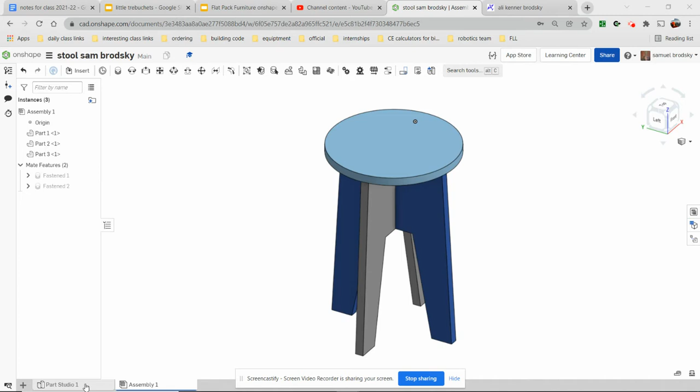The first thing I do is download my sketches by right-clicking on them and exporting them as a DXF. Let's go top. It's set to download, set to DXF, not DWG, and I'll export. Do the same for sketch 2.

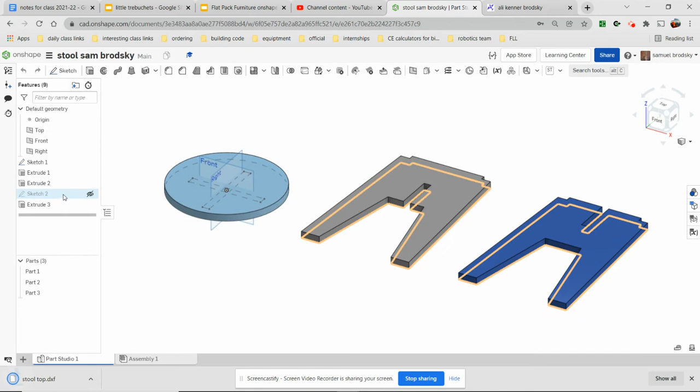Now I have the two parts of my stool, drawn in Onshape and exported as DXFs, which will import into VCarve. I'll create a new file. I'm going to make it 24 by 18 — I can get this out of the small ShopBot, maybe.

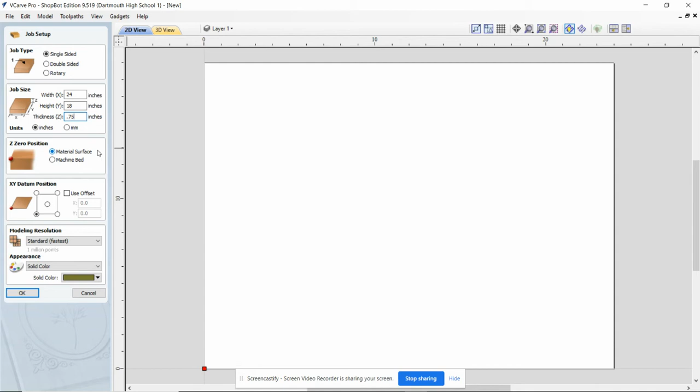0.75 thick, because I've chosen 0.75 thick — that's up to you to choose. Material surface, bottom left. Choose OK.

Now I have to import my files with this button here, import vectors. I'll have to choose a downloaded file to import — the first thing is the stool top. Open that. You're going to get this error — don't worry about it. There's my stool top.

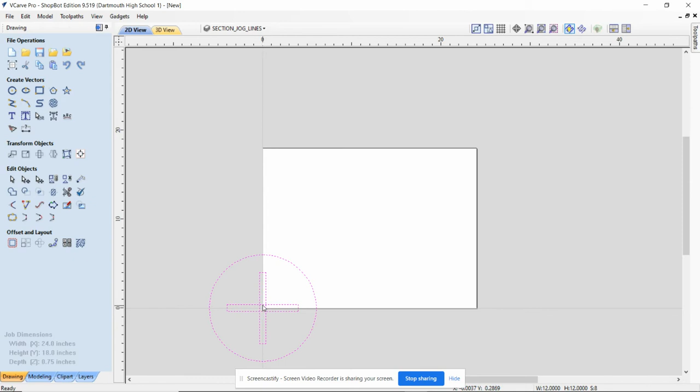If everything's selected, I can click again on it — that is, if the whole thing is selected, not just part of it. Then I can second click on it and move the entire thing all together. Put it up here, sure.

All right, now it's time to import the legs. Again, ignore the error — there's my legs. Second click, so I can move this.

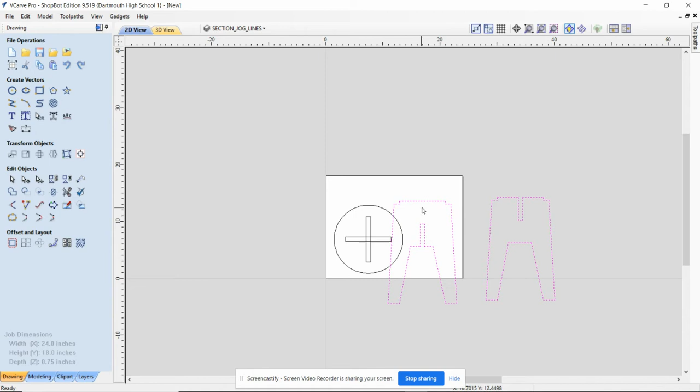It looks like my 24 by 18 is not going to work, so I'm going to have to increase the size of the file. I can actually bring these a little closer together, though, and save some wood. I could probably flip that over as well, but I'm not going to worry about that quite yet.

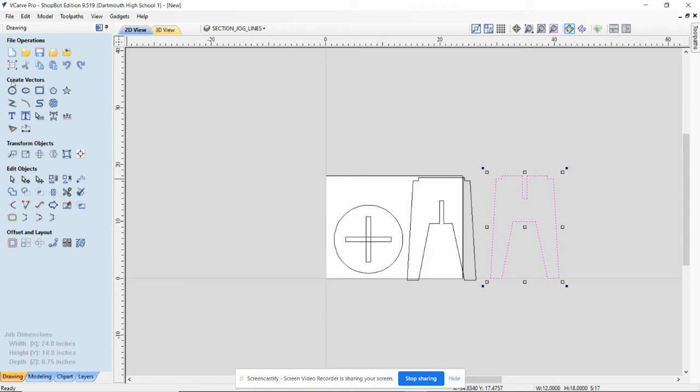Let's get it sized correctly. It looks like the width is maybe — let's see, looks like it's 40 overall, so I'll do a 48. I mean, it's basically 46, but lumber comes in 48. 18 doesn't quite seem to be enough, which makes sense because the stool is 18 tall, so I'll make that, say, 24.

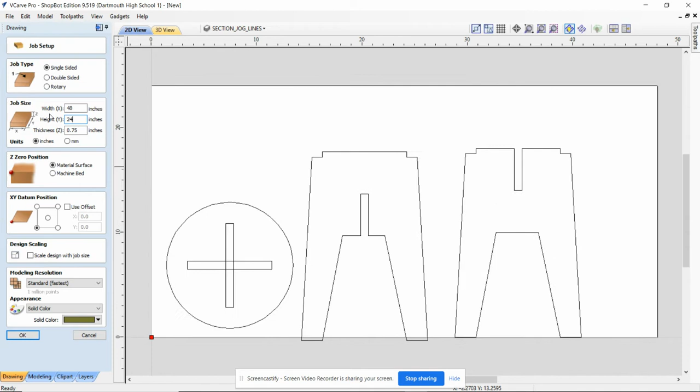Then I can choose everything and use this command to center it in the material. There's a little bit of waste here that I might want to clean up later. I'll deal with that on a case-by-case basis.

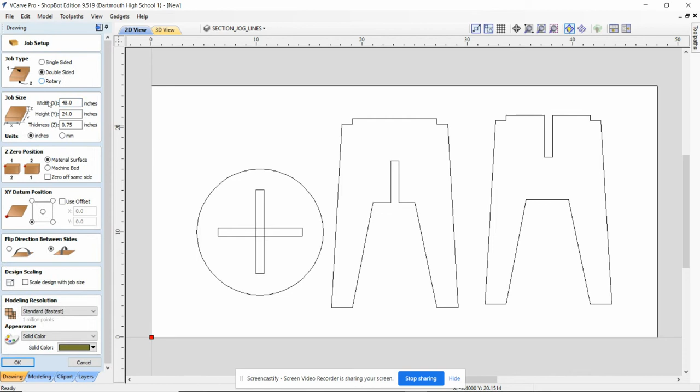So now I've got these files in here. I'm going to change this to double-sided, because I'm going to want pockets in the bottom and etching on the top. Not everyone will have a double-sided piece, but this one is — that means I can have cuts on both sides of the lumber.

Next step is cutting these pockets, so I'll select these pockets. Wait, it doesn't look like I have pockets yet. Same thing here — I don't have complete tool paths.

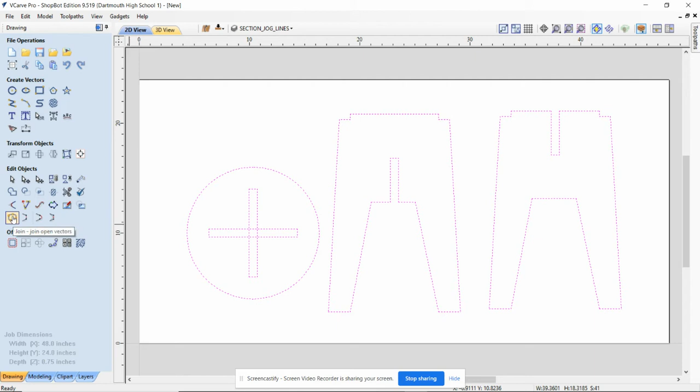So the next step is to select everything and join them. Initially, there's one closed vector, probably that circle, and a whole bunch of open ones. After I do this, there's 4 closed — there will still be 3 open. I'll have to find those and fix them.

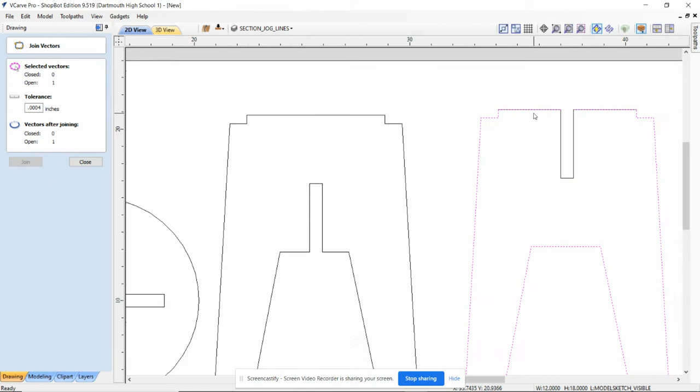It looks like there's a weird little extra line here, and on this one there's some weirdness going on. Sometimes, depending on how it's drawn in Onshape, you get weird stuff out of here. So what I can do is zoom in — looks like it just didn't know how to connect them.

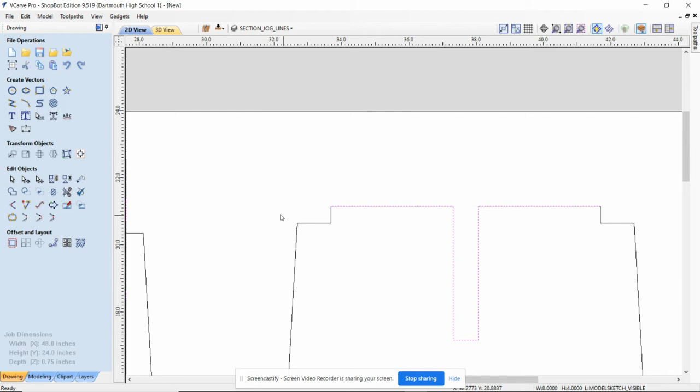Let's see if I can try one more time. No, it won't close them. But what I can do is use my cut command to cut one of those extras. Now I only have that.

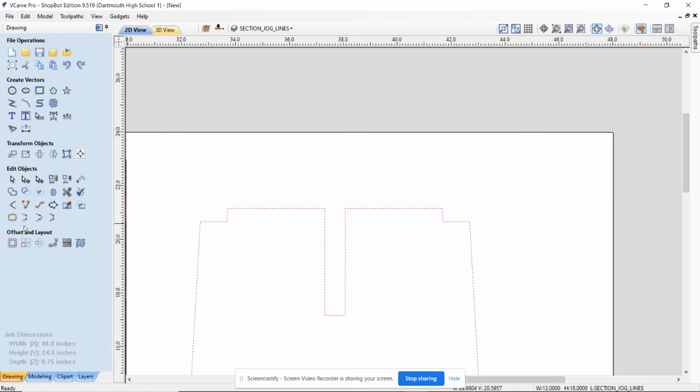Still something weird going on here. I'll use my cut command to do that — cut one of the extras. Perfect, now when I look at join, they're all joined. And if I look at the whole thing, each one of these is all one particular cut.

Over here, I'm actually going to want to cut out those centers, so I'll use this cut command again to chop out these little bits. Now I have a pocket.

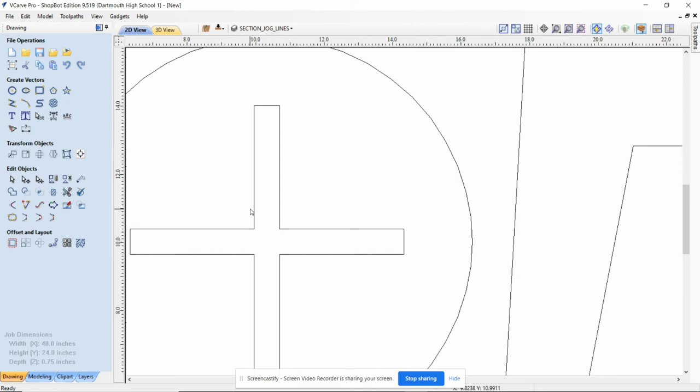So with my pocket, I'll use the pocket command, which is in the toolpath commands. By clicking up at the top, you get to switch between toolpath and drawing tools. You can have them both open at the same time, but I find that unnecessary, and it cuts down on your workspace. Here is the pocket toolpath.

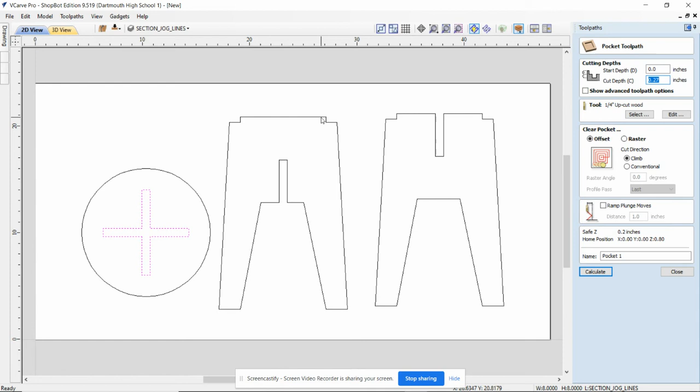I'm going to cut a depth, which has to be the same as this height here, which hopefully I remember — but if I don't, I can go back and check. I'll do that now. I'll use this tool to measure the distance from there to there. That distance is 0.5 inches.

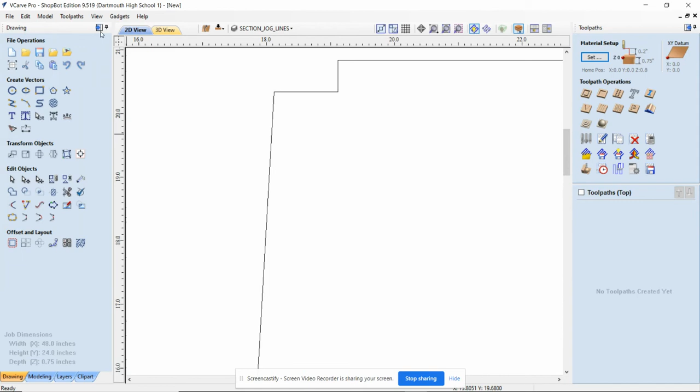Excellent, so now I'll go back here — these pockets will be 0.5 inches. Pocket tool, click here, I'm going to go 0.5 inches down. I like to ramp my plunge moves about an inch. Don't need the advanced options. And I'll call this the stool top pocket.

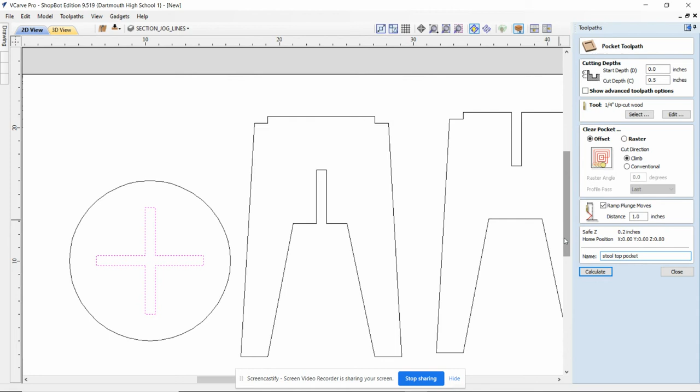And let me close the door.

We can preview the toolpath. That's exactly what I wanted. Perfect. Now I can move on back to my 2D view.

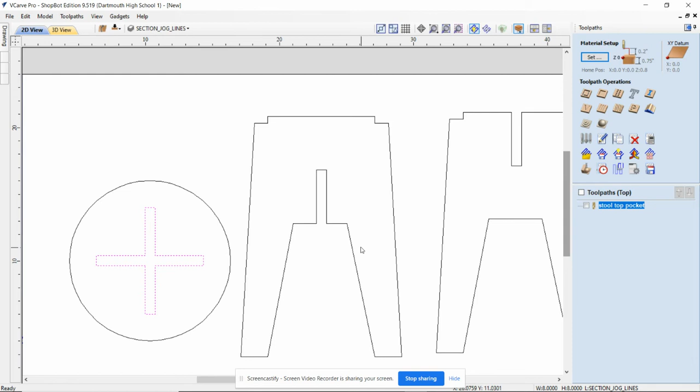I have to start cutting the outsides of this stool, so that can all be at once. I'm going to shift select all of these and do a profile toolpath. This is to cut the outsides. Make sure my machine vectors are on the outside right. I'm going to choose a bit - I use that same quarter upcut wood bit because it's nice and I have a lot of them.

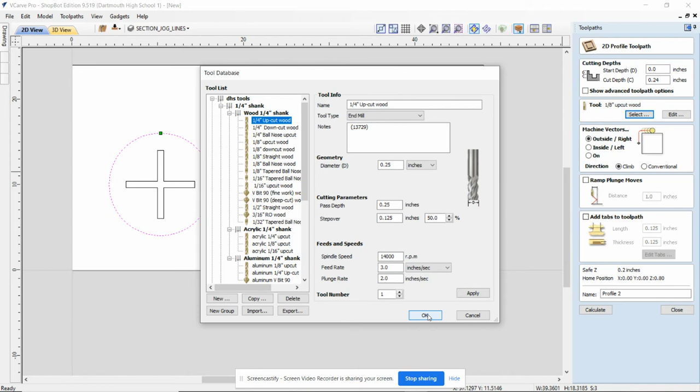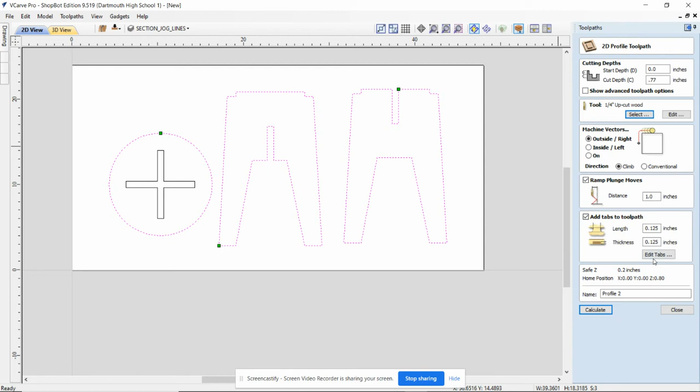I'll choose OK. I want to cut through the wood this time, so instead of 0.5, I'm going to be going 0.77, which is all the way through and into my spoil board because this has to get cut out. I'm going to ramp the plunge moves and add a tab. I'll edit these tabs - I need at least 3 tabs per piece, just to hold it in place while it's cut.

And I feel like it might be better there. I don't know why I feel that way, but I feel like it might be better there. This one might be stronger here.

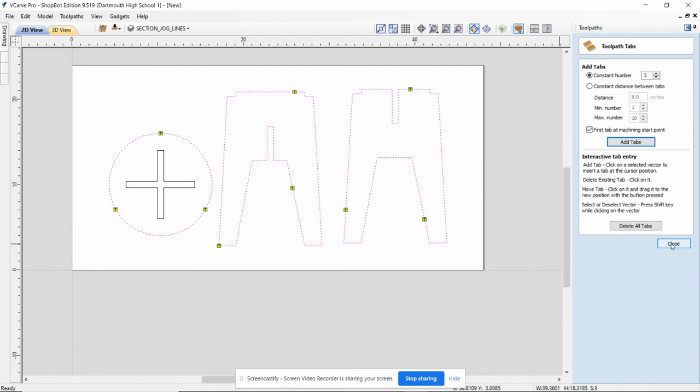All right, and they are not big enough for this giant object. I'm going to make them about 0.5 for something this large. They were set smaller for a ping pong paddle. And this is the...

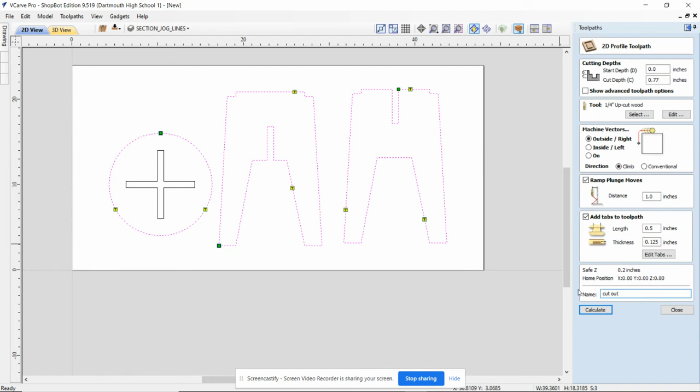All right, that looks pretty good. Back to my 2D view. And if I don't want these arrows, I can uncheck the toolpath - if I do want them, they just show where the tool is going.

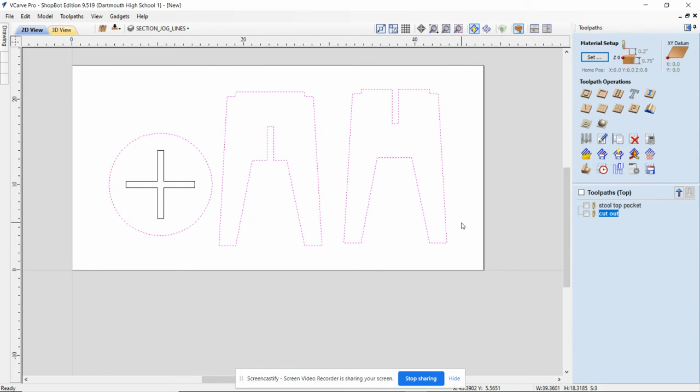So there's only one problem now. Preview - preview all toolpaths, that's exactly what I want. These tabs are holding it in place while the cutout is done. The only problem is if you zoom in here, these are rounded and those are square, and that's rounded, but this is square.

So we're going to have to add dog bones to make that fit. I also want to check out how long this will take.

Not too bad - 14 minutes, 4 minutes for the top, for the pocket. Yeah, that would work. If I wanted, I could try to change the bit and see if it would go any faster.

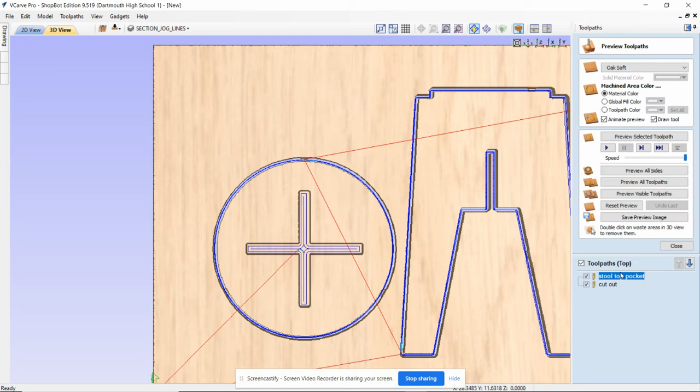That would be pretty easy, it depends on your design. I'm just going to see if I can try a 3/8 upcut for the pocket, and a 3/8 upcut. This is a bigger, chunkier, faster bit.

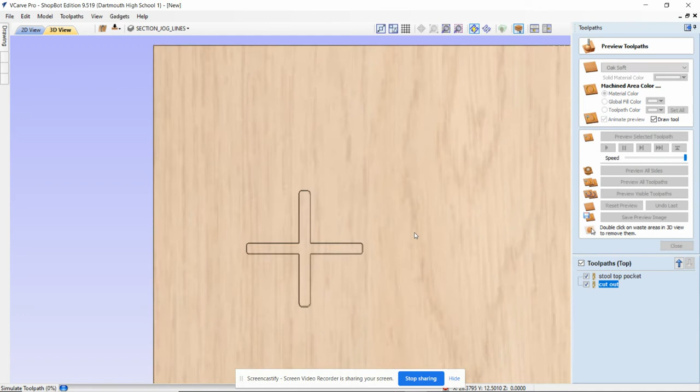That error was just that it's going to cut through the material - I agree it will. Reset the preview and I'll preview all toolpaths. So it's more of a round, which is a bit of an issue, but not a huge one.

We'll check the time - it cut down the time a lot. Mainly that's because this bit is so big and chunky, it can go through the plywood in one pass. It doesn't need 2 passes.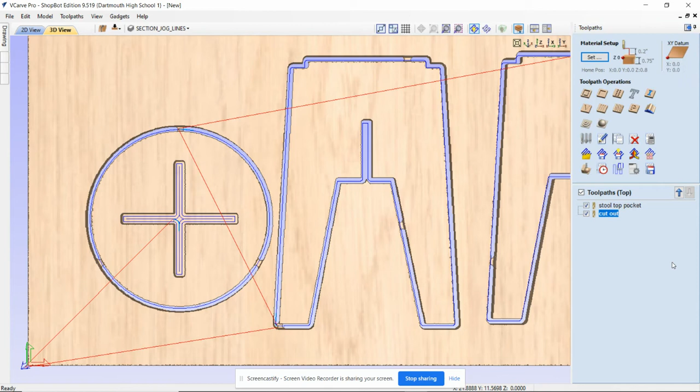But let's add some pockets to it, so we have to do the pockets in the 2D. Now there's a reason I chose my bit before my pockets, because adding those dog bones - we have to add the dog bones. There's a reason I chose a bit before adding dog bones, and that's because we have to know the size of the bit to make the dog bones.

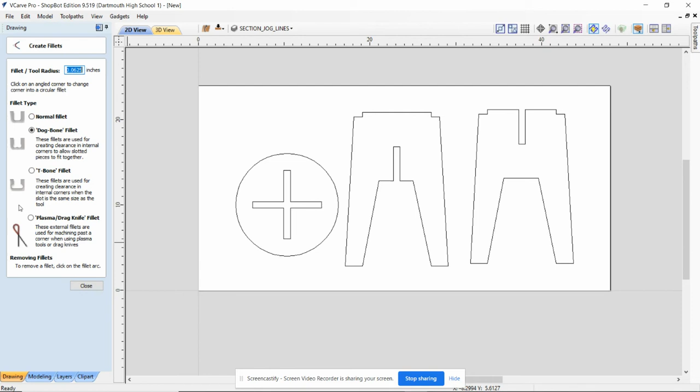To make dog bones, click on fillet, click on dog bone fillet or T-bone. I like dog bone, but you can use either. And then put in a tool radius - so a 3/8 tool has a radius of 3/16.

Now if you don't know what 3/16 is, that's okay - they don't, okay, because you must have a calculator here. 1875.

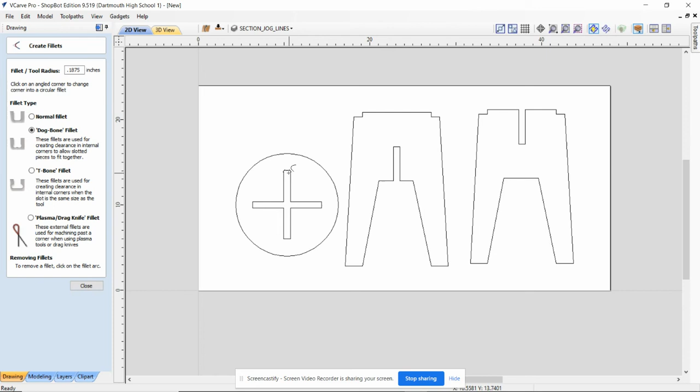Okay, so there's a fillet radius, and I have to choose a fillet. What it's doing is it's making a little lump, and that provides a path for the next piece to fit on.

I'm also going to need one here because that has to fit in there at the top. And I'm going to need one here and here and here. Now these are also going to have to fit together, so I'll need one there and there and there.

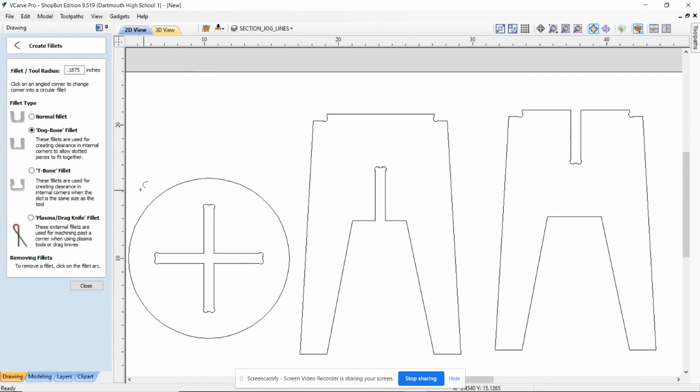Now I don't have to redo my toolpaths, but I do have to recalculate them, because if I went to preview now, reset the preview, previewed all toolpaths, there's no dog bones - it's running the old one. So I'll recalculate all my toolpaths.

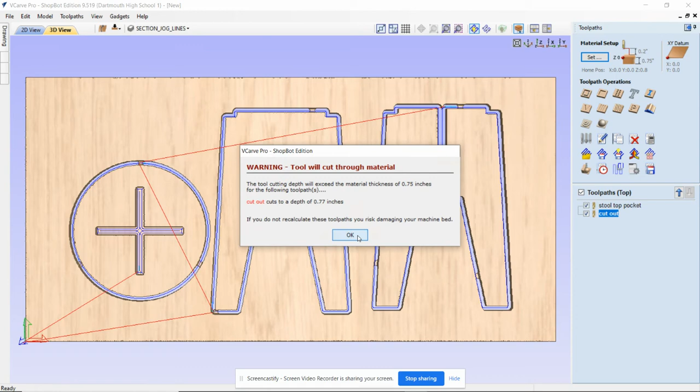It's going to redo it, and now I preview all toolpaths - see, it cuts out my little dog bones.

Excellent, so my stool is all cut, except I wanted to add some text to it. So I'm going to flip it over, and on the other side, I can't really see anything.

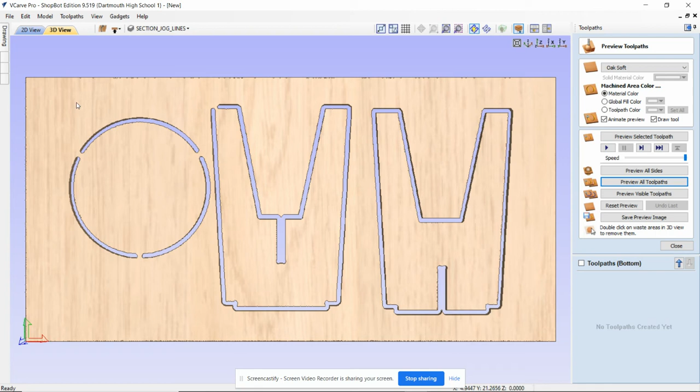But it shows me what the sketch looks like over there, so now I can add some text to the other side, or an image.

What image do I want? Well, this stool - spoiler alert, I already actually made it. I put my wife's dance company logo on.

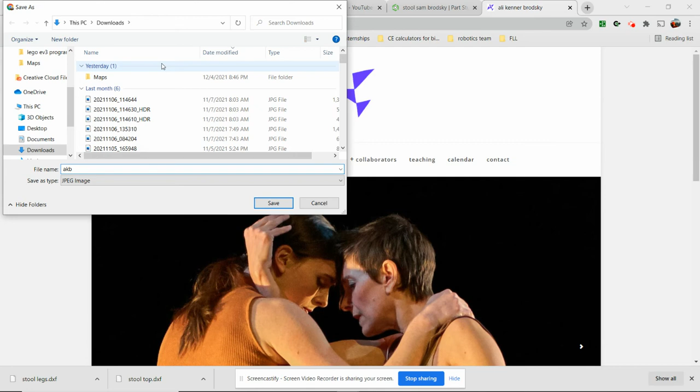So I'm going to save that image as AKB. Now that that image is saved, I can go over here to VCarve, and I can import that image.

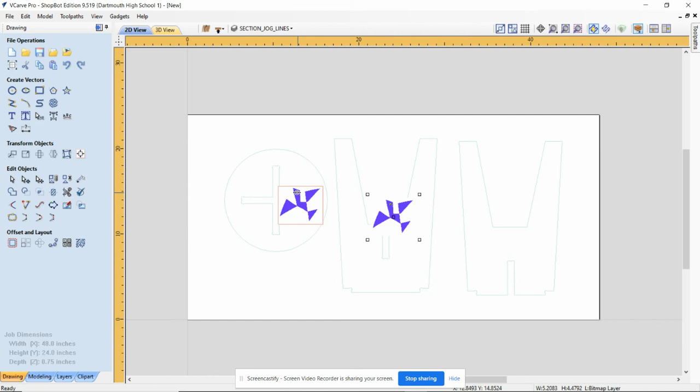I'll second click to get the ability to drag it over here, and I can use these corner handles to size it correctly. Make it a little bit bigger, but I don't want it all the way too big. All right, so now I have an image.

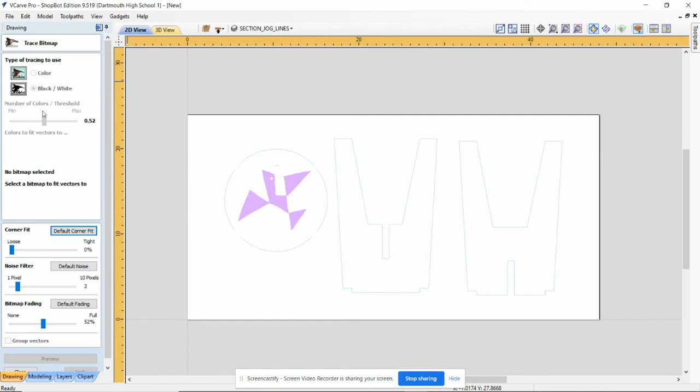I need to trace that. So this was importing the tracing bitmap, which is now in there. And now this one actually traces the bitmap, so I can click on that.

Black and white does not like tracing black and white, so let's use color and colors to fit vectors to. That's most of them, but we can keep clicking if we want. There's some of it that's all these different values, probably doesn't really matter. What I don't want to do is click the one like that, no, because that's some of the outside bits, or here, that's everything, right?

So now I've traced all of that. You can leave this stuff alone usually. Let's preview that - looks like a good tracing.

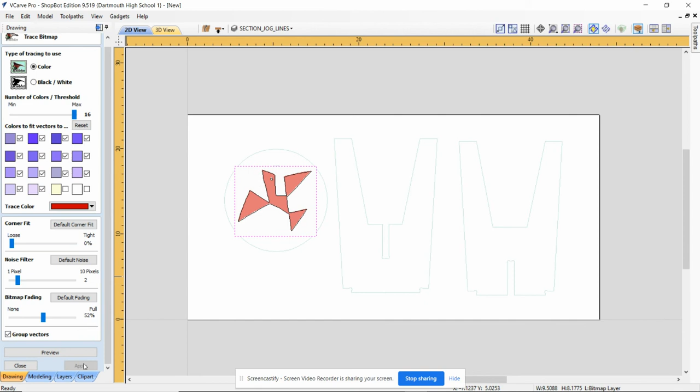Apply and close. Now I can grab this bitmap and drag it out of the way. What's left is my tracing.

So back in my toolpaths, I am going to cut that design out. There's different ways to do it - I could trace it with a little line, or I could pocket it in the center. I think I'm going to pocket it, so we'll choose that, and use our 3/8 upcut again.

Cut depth doesn't have to be so deep, maybe 0.1. This is just C. We can ramp our plunge moves, sure, it doesn't actually matter here. I'll call this the bird.

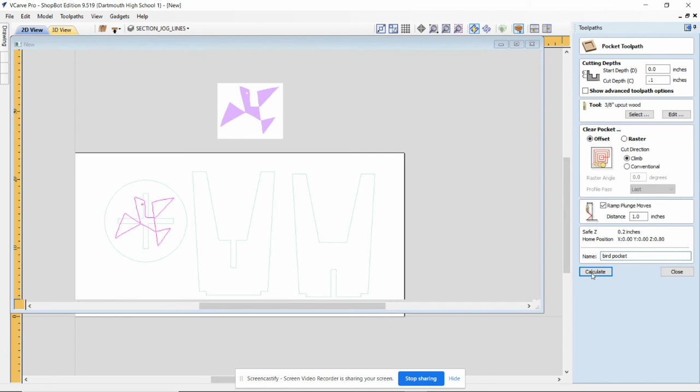All right, let's preview the selected toolpath. That looks crappy, and I can tell you why - it's because I'm using a big fat bit and it doesn't fit inside that. So actually what I'm going to do is double click on that, and select, switch back over to the quarter upcut over here.

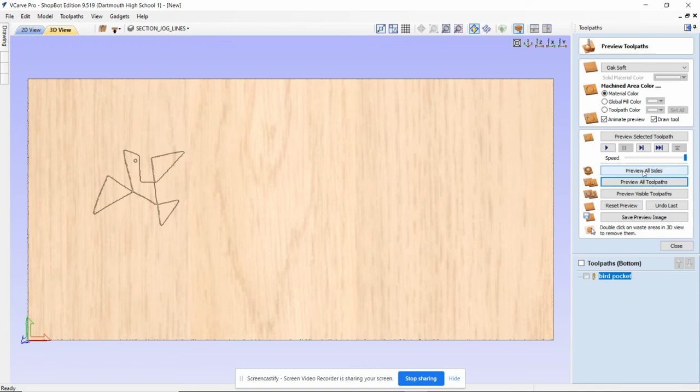That looks better, I like that. Now again, I could preview all toolpaths, I could also preview all sides. So it's going to do that - cuts everything out. Love it.

Looking great. I am noticing one error - one of my tabs is in the wrong place and got cut through. I should fix that. This I'm pretty happy with. There's only one thing remaining other than fixing this.

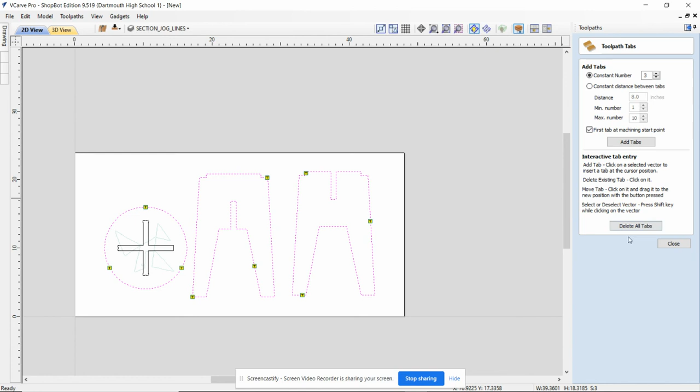We can reset the preview and preview all sides. All right, looks great now - that little tab isn't cut through. If I flip it over, there's my bird.

And the next step is to align it. The difficult part about two-sided machining is when you flip it over, making sure it stays in the exact same place.

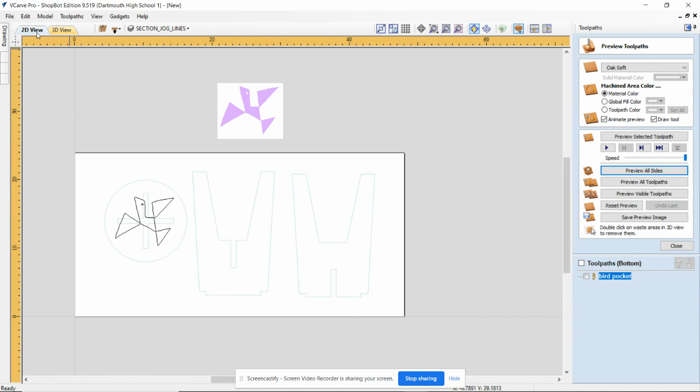So we have to make some alignment holes. All right, I'm going to draw 2 circles for that reason. I'll go back to my drawing tab. These circles are just going to be for alignment. It's snapped to the middle, which is useful.

And that one had a diameter of 0.375. I'm going to change that to 0.25. The reason is I already set up a 0.25 toolpath with that bird. And I'm going to apply that. Put another one here, and diameter 0.25 is all set.

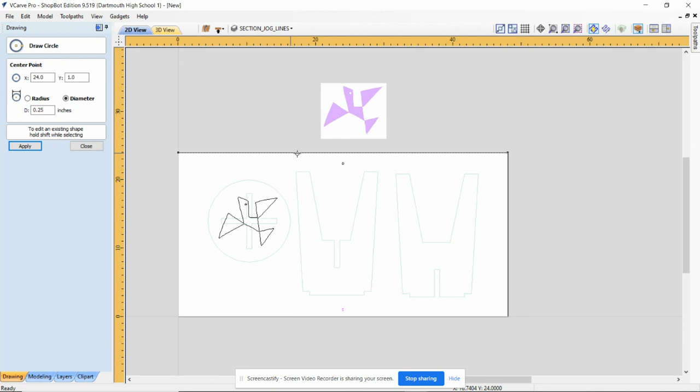To make things even, I'm going to put that at y equals 1. And then here, if I shift click that, I'm going to put that at y equals 23. Why? Because that makes it 1 inch away from that edge. So now these are in the dead center of the piece, and 1 inch away from the edge.

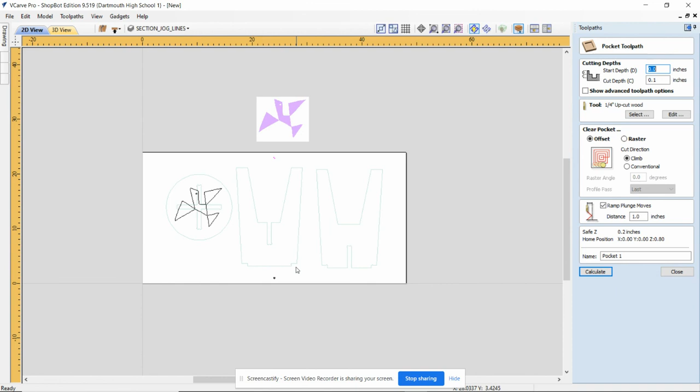Over here, I'm going to add a pocket toolpath for those 2 holes. Though honestly, I could also do a drilling toolpath, doesn't really matter. Quarter upcut wood - I'm going to cut all the way through and well into the spoil board.

So maybe a 1/10 of an inch in, so 0.85 - maybe even that's not enough, maybe a 1/4 inch in, so 1, this is so 1 even. So this is going to go all the way through and a 1/4 inch into the spoil board.

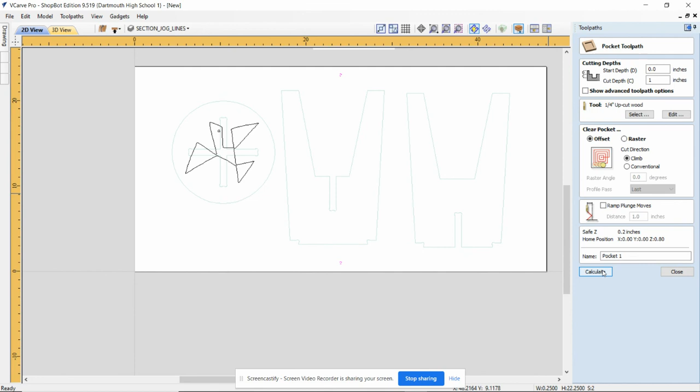My tool is going to be a 1/4 inch upcut wood. I do not need to ramp the plunge moves here because it's just going to go straight down. And I'm going to calculate, and I'm going to preview all toolpaths.

So what it's going to do is pound right through all the way deep in, and then I'm going to stick a peg in there. So after I run this first toolpath, then I'll flip it over and run the second toolpath. And honestly, I might just go back to the 1/4 inch upcut, even though it would mean changing all my dog bones, simply because then I wouldn't have to switch between the 1/4 and the 3/8 bit. But it could be done either way.

All set. Now it's time to save your toolpaths and export them to USB. That will happen on a different video because I have to do that with you.